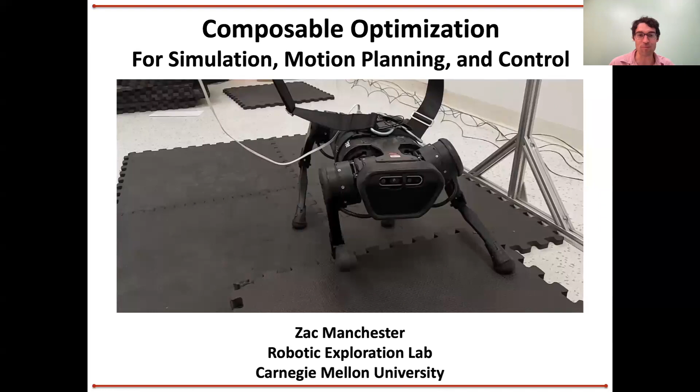So just as a little warm-up thing, and for some motivation and some of where my background is, I was actually at JPL last week, and my first love is space exploration.

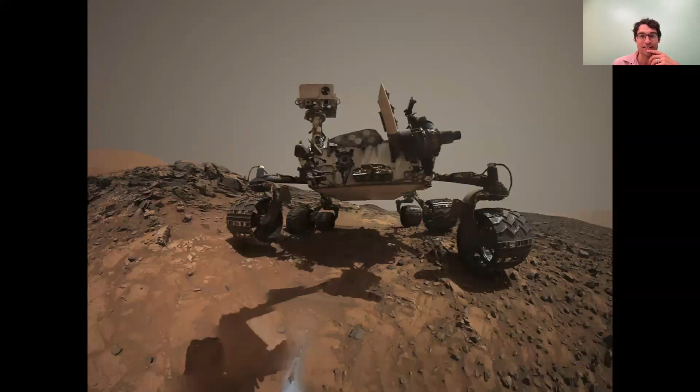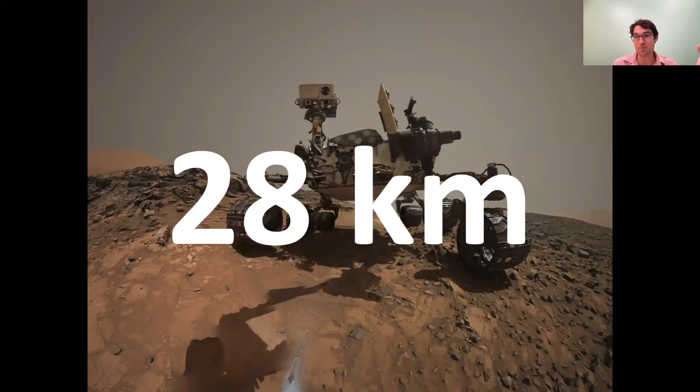This is one of my favorite robots. I got to see the spare of this on Friday in the Mars yard at JPL. This is the Curiosity rover. This thing's been on Mars for 10 years now, and in 10 years it's gone almost 30 kilometers, which sounds really impressive, covering 30 kilometers on another planet. It's an amazing technical feat. But if you divide those numbers, it sounds a lot less impressive—it works out to about 7-8 meters per day of driving.

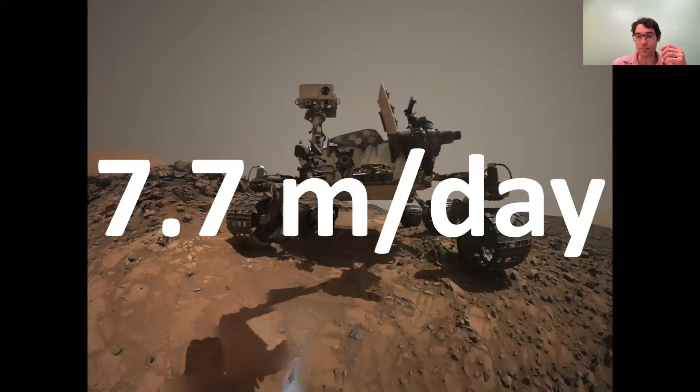What they do there is they have a replica of the rover, and they have 3D imagery all around the rover on Mars. They try to recreate the landscape around the rover in this Mars yard, and then they practice driving in the exact same terrain, as close as they can make it, to figure out exactly how to drive the rover. Once they figure it all out, they uplink the commands. So there's very little autonomy—they have worked on autonomous driving, but whenever they get into more interesting scenarios, this is how they do it. It's painstakingly hand-engineered. They figure it all out, and then they uplink everything.

And you can kind of understand why—it's very high stakes, very expensive. But the fact remains that it's a major bottleneck to covering more ground and doing more science.

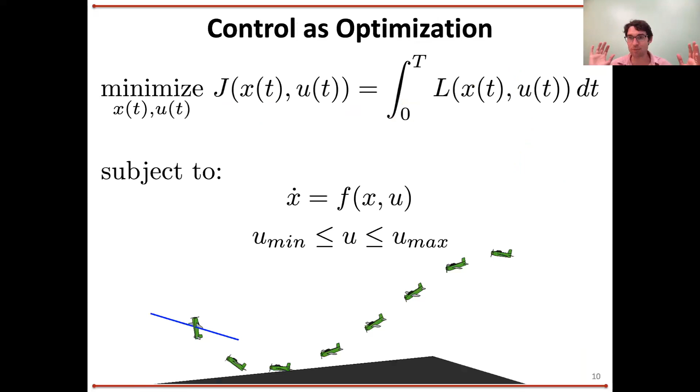So the gist of this is you have a model of your robot where you have a dynamics model, x dot equals f of xu, which you can get a bunch of ways from f equals ma to sophisticated multi-body dynamics things. Then you have constraints, maybe on your actuators, maybe joint limits, all this kind of good stuff. You write all that down, that's your model.

Then you write down what you want your robot to do in the form of an objective function. This can be something like minimize fuel use or energy cost, minimize time to get to a goal. At the end of the day, this is really encoding the behavior you want, right? And it's a bit of an art to write this down, but if you do this enough, you get pretty good at it, and you can pose these problems pretty nicely. And then you can get your computer to solve it, and out pops interesting behaviors that can take full advantage of the dynamics, respect joint limits, all this good stuff.

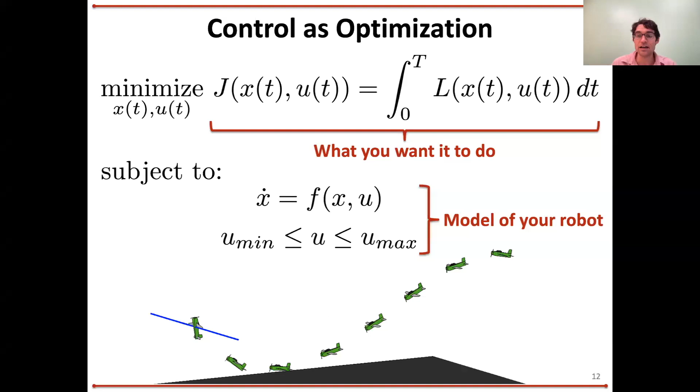Also, maybe not so surprisingly, we can do state estimation as optimization. And it also looks a whole lot like that trajectory optimization problem we just saw, the control problem. There's basically, you get a least squares loss instead of your maybe more general objective function. And then you have a very similar model of your robot. It turns out the only difference is you end up with this noise term in place of your control inputs. Otherwise it's basically the same problem, and they look really similar. Okay, so state estimation, also not a super surprise.

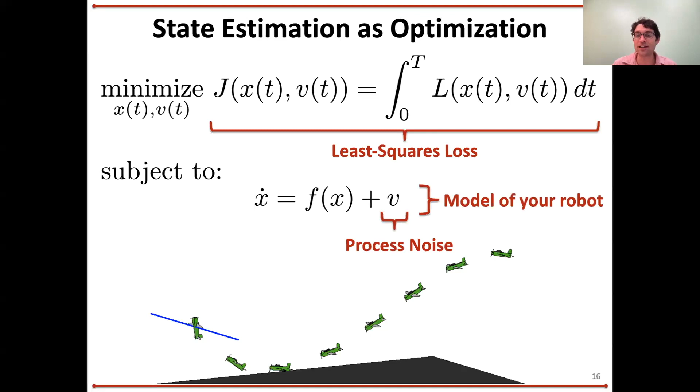And there's a long history of kind of duality between estimation and control that probably a lot of you guys have heard about. The one that's a little weirder, maybe slightly more surprising but not too surprising if you've taken an upper level graduate physics course and learned about variational mechanics, is that we can actually model physics as optimization as well.

There's a long history here, this isn't an original thing, right? But where this gets interesting, and where I think there's fun to be had that maybe is a little less standard in the robotics community, you can take this action thing. If you learned about this in grad school, what you usually do is take this thing and then try to take some kind of variational derivative, minimize this thing analytically.

And if you do that, basically what comes out of that is the Euler-Lagrange equations and all the usual dynamic stuff you're used to. Traditionally, when you learn this in a physics class or advanced dynamics class, that's what happens: you do optimization here in continuous time, and then you get Euler-Lagrange equations, and that's where you live forever.

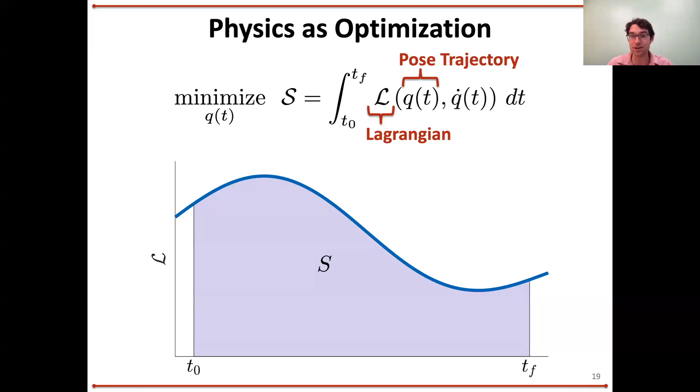But if you take this optimization problem more seriously and really think about this as the fundamental object to deal with, and if you have some inspiration from doing numerical optimal control and solving trajectory optimization and MPC problems, you might think about directly minimizing this thing with respect to the trajectory, like you would in optimal control. So you can discretize that action integral, do this in discrete time. And now what you have is like a pretty standard nonlinear optimization problem, exactly a trajectory optimization problem, in fact. So this idea is kind of cool.

It turns out this is a much more recent idea. This dates back only maybe 20 years or so, to the early 2000s, and was really pioneered by Jerry Marsden, who's a famous applied mathematician at Caltech. A couple of his students are still playing around with this stuff.

What turns out to happen is basically: discretize first, then optimize, rather than the classical way, which is optimize in continuous land and then use a Runge-Kutta method and discretize that. So that's one way to think about it. It's also super closely related to collocation methods and optimal control. And there's lots of cool things about this.

These things are called variational integrators. They do cool things like preserve momentum and energy, and that's why math people care about it.

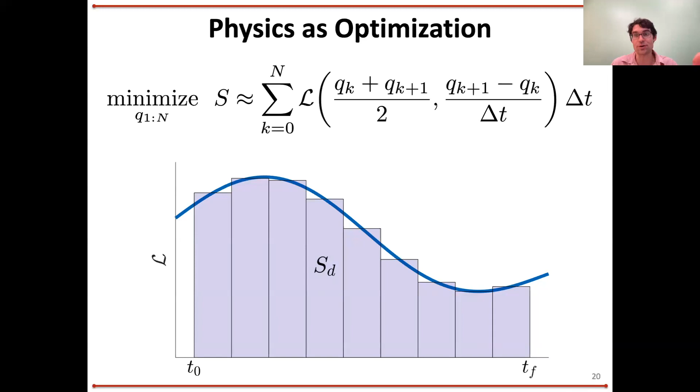But there's a more nuts and bolts practical reason why I think we should care about this stuff in robotics, which is: now that I write this down as a more or less standard optimization problem, and think about it like a trajectory optimization problem, I can now think about adding additional constraints to it. In particular, for thinking about contact dynamics, I can throw a constraint like this in here, this being a gap function or signed distance function, phi.

Essentially what I'm doing here is saying, think about a brick, and Q is the pose of the brick. I can put a constraint on here that says the brick's not allowed to go through the floor, that its height has to be greater than or equal to 0.

And if I solve this in the normal way with a constrained optimization solver, all of a sudden what you get out of this basically for free is impact dynamics. And unsurprisingly, the Lagrange multiplier of this constraint ends up being the contact impulse or force, and everything more or less works out like you'd expect.

And it turns out if you look at this, it's very closely related to time stepping methods, like the classic Stewart and Trinkle kind of stuff, if you're familiar with that. It turns out this is, I would argue, a strictly better and more accurate version of this.

To get from here to the Stewart and Trinkle time stepping stuff, you end up making a bunch of additional approximations and linearizations in certain places. So this is a bit more accurate or principled way of getting at time stepping methods. So that's impact dynamics.

The next piece of the puzzle is Coulomb friction, if you're worried about manipulation and walking kind of stuff. And it turns out this is also an optimization problem, a little bit different flavor. This is the maximum dissipation principle, if you've heard of this. Essentially it says that the friction force B that you get is the one that minimizes the instantaneous rate of change of kinetic energy. So this is dissipation.

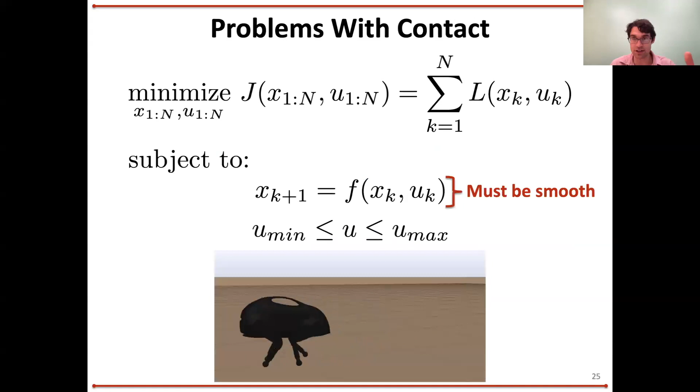Like I have to be able to take gradients, right? Because at the end of the day, when I try to solve something like this on a computer, I'm always doing some version of gradient descent, Newton's method, right? And I need at least one derivative, often two derivatives, for all these functions in order for me to make progress with an optimization method.

And so in this context, the dynamics are non-smooth when I have impacts and things like that. And then these derivatives don't exist, or they blow up, and bad things happen, right?

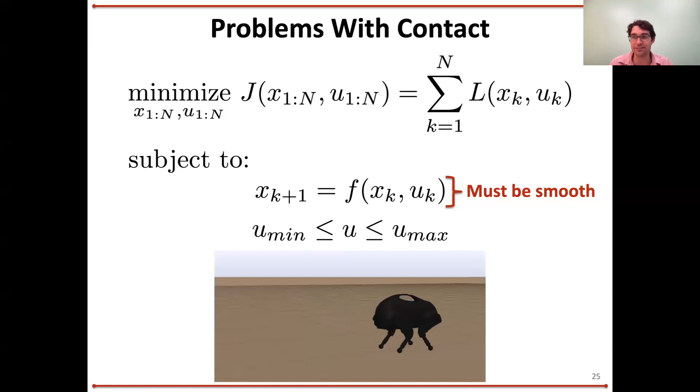So there's a few approaches to dealing with this. One is the so-called hybrid approach, which is to pre-specify what are called mode switches in the business, but these are just the exact times when you're going to make or break contact. So you can imagine in a walking problem, this would be if I can pre-specify the gait.

So if I have a biped, this is pretty easy, right? Left, right, and maybe heel-toe, that kind of thing. But if I can pre-specify the timing and the ordering for all these contacts, then what I can essentially do is bake that into the optimization problem as a set of constraints, like they're a priori in there.

This is what you have to do. I'm basically just optimizing over the smooth segments in between these impact events. Now I'm back to the smooth problem I know how to solve. By pre-specifying when these contact changes are going to happen, I can basically remove them from the optimization problem, and now life is good.

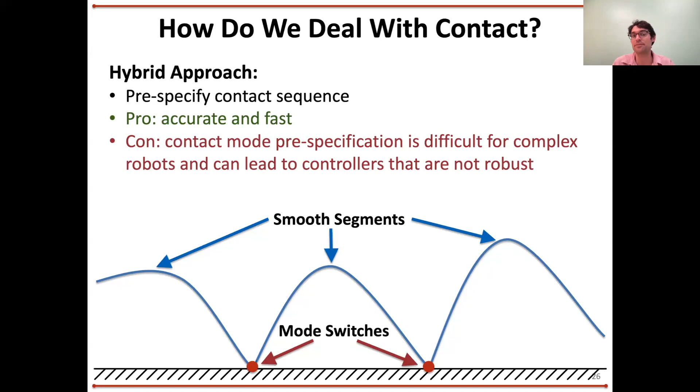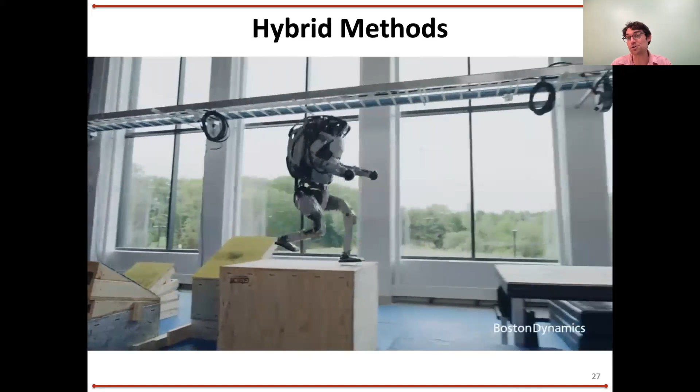This has been hugely successful. This is, I would argue, the standard approach, and roughly speaking it's what these Boston Dynamics things are doing, and a lot of the quadruped videos you've seen are doing this kind of stuff. You can do amazing, super sophisticated things with this.

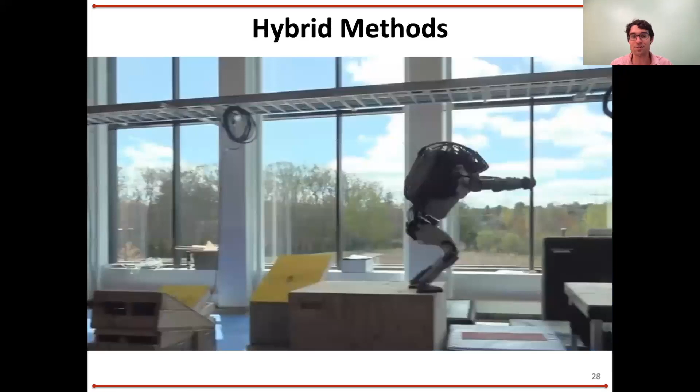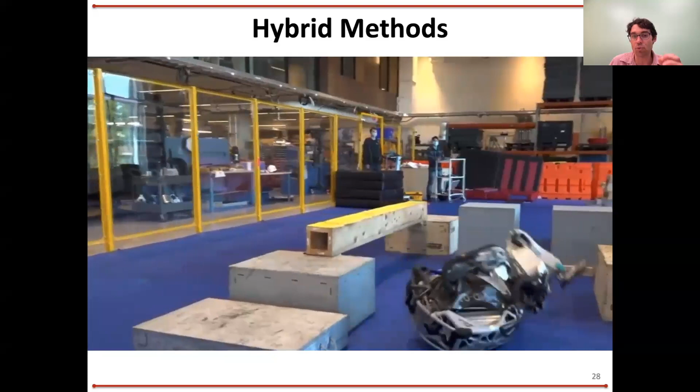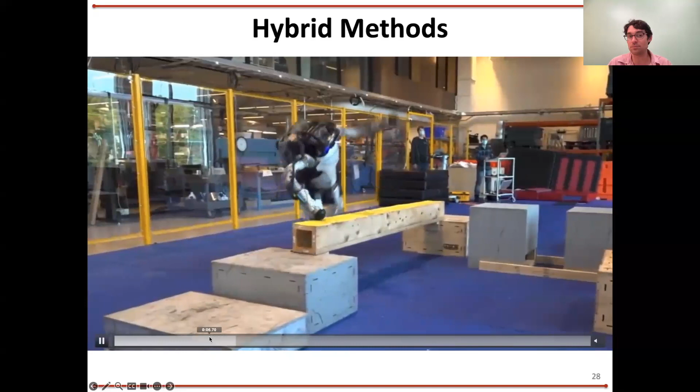But there's a key issue: if you look critically at the blooper reel videos that Boston Dynamics and many others put out, you'll notice that almost all failures come from unplanned contact events. In this video, clearly the plan involved the robot jumping over without the foot touching the bar. But things are a little off, there's some error in the state estimator, and the foot ends up grazing the bar.

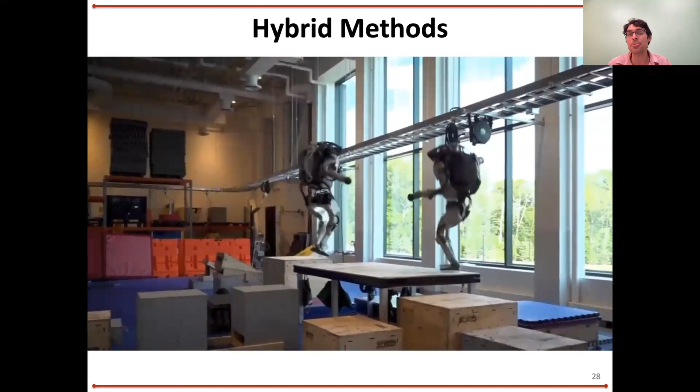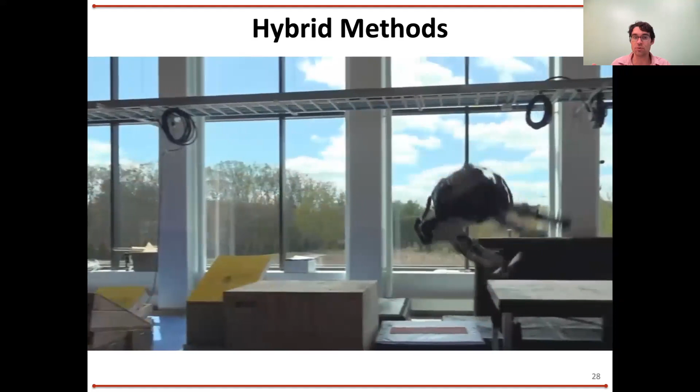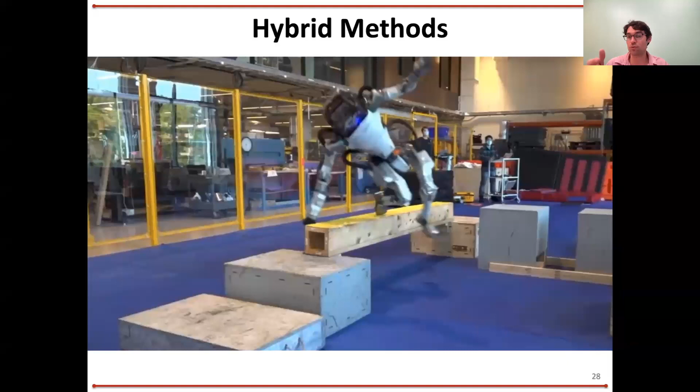And now it fails. At the end of the day, the reason is these hybrid methods assume a certain contact mode sequence. One way to think about it: the controller is essentially running open loop on the contact modes. You've assumed the modes will happen in this order, and these are the only parts of the robot that will touch the environment. If online, due to disturbances, the robot inadvertently makes contact with another part of its body with the environment, the controller has no way of reasoning about that, because you've baked that in as a prior, and it just can't recover.

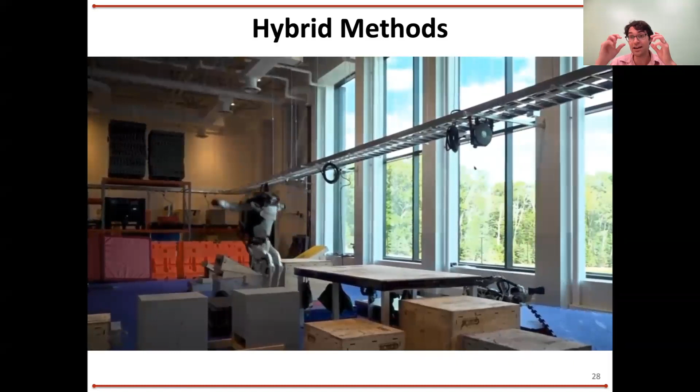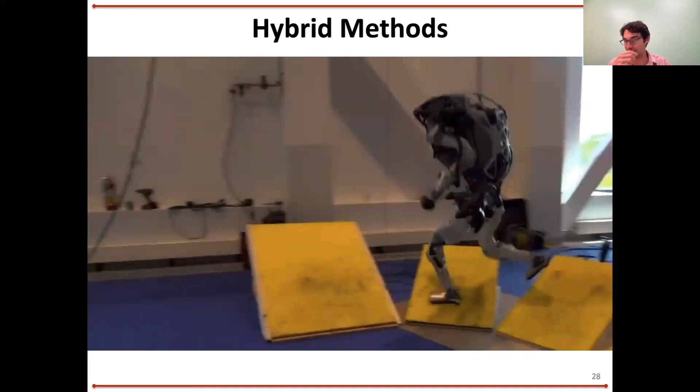That's the key issue with these hybrid methods. In practice, a lot of the control stacks for these things end up with a lot of heuristics to do things like push recovery, where they just have a laundry list of 'if this, then try this other thing' kind of heuristics for dealing with these scenarios. But the controller at a base level isn't really equipped to reason about this stuff.

So that said, there's this other set of ideas that have been around for a while, going back at least a decade, called contact implicit methods. The idea here is kind of what it sounds like: you're going to try to optimize over not just the state and control trajectories, but also the contact forces, and do the whole thing. Now the controller can reason about these contact events.

But because of the non-smoothness and the problems with differentiability, historically these things have been really fraught with challenges. You either smooth out all the contact stuff to get those derivatives, but then your physics is not accurate and it doesn't work in the real world. Or if you crank up all those stiffness parameters to make it more realistic, you get really stiff dynamics equations. The ODEs become really hard to integrate, things start to blow up on you, and you can't optimize. So there's all kinds of numerical problems with this.

Essentially what I'm going to tell you about now is a way to sidestep the severe numerical difficulties with this setup. The overall set of ideas here is what I've coined — I don't know, this is kind of what we're going with — composable optimization.

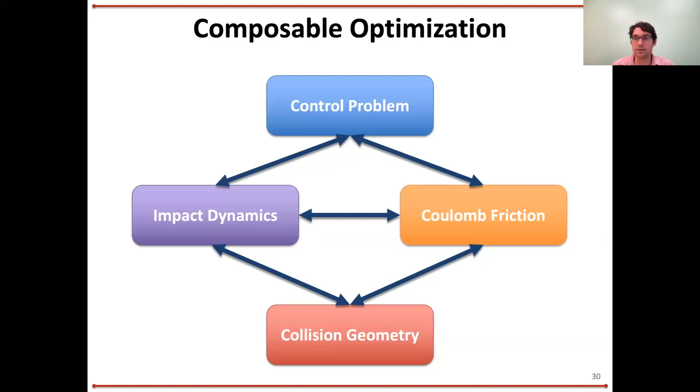So there's variables that show up as external parameters or problem data in one problem that are decision variables or optimization variables in the other. So how do we hook these together? The key idea we use to attack this is the idea of a differentiable interior point method. We use interior point methods to solve each of these problems—so each of the blocks, the impact dynamics, the collision detection, the Coulomb friction unit—we're going to write an interior point solver for each of those blocks. And in many cases, those subproblems have nice properties.

So for example, the Coulomb friction problem is a second order cone program. It's convex. We know how to write nice interior point methods for these. So we write down a good interior point method for that problem. It's tailored for that problem. And then it looks like this, right?

So if we take the example of the Coulomb friction thing, f would be minimizing the energy dissipation. And theta would be like the normal force that comes from the other problem. We're not optimizing over theta here. We're getting it from the other block, right?

Okay, but the problem's solution depends on theta, right? And so in order to wire these things all together and jointly solve this whole thing, essentially what we need is the ability to extract gradients of the solution with respect to theta. If I change theta because it's coming from this other problem, how does that impact the solution of this problem?

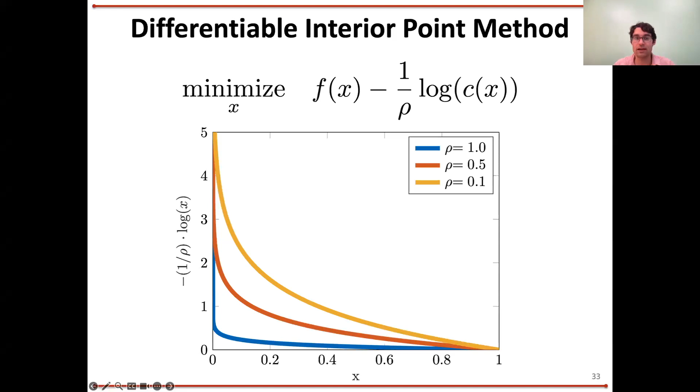Okay, so the upshot for us is that once we've put it in this log barrier form, it's smooth, and I can take this and differentiate it. So we basically just differentiate that log barrier version of the problem, the interior point problem. And now we can use this implicit function theorem trick, and we can get all the derivatives we want, right? So basically we can get the solution, we call it the solution x of theta here. It's the solution of this problem, the x that is a function of theta, effectively depends on theta, and we can get this gradient or Jacobian matrix or whatever. And this basically lets us get all the derivatives of all those blocks and then hook them together into one big outer optimization problem.

What else is there to say about this? Yeah, that's the essential idea. Yeah.

I think Matt has a question.

Matt? Yeah, so I can see this working for problems that are largely free space, like jumping around on blocks, where it's extremely easy to find a feasible point right from the start. Your feasible point is that you just jump right up in the air and land at your goal. But for example, for something like a snake in a maze, finding a feasible point to start with and staying feasible, which implies a schedule for rho, is not so trivial.

Yeah, so there's lots to say about this. One thing to say first off the bat is that there's actually pretty straightforward tricks for doing what's called infeasible starts with these interior point methods. These are actually standard in the literature, and all the standard solvers play these games. So you don't need a feasible initial guess, it turns out. I could talk more about how that works - it's a basic little trick that you can play.

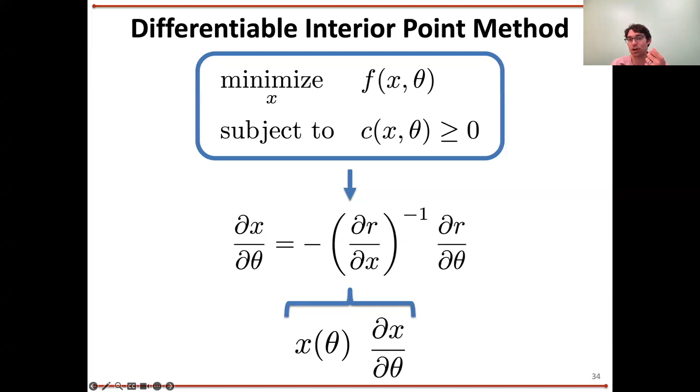So what we end up doing in practice is we can solve the problem, find X to high precision, but then we basically cache the solutions as you converge, and we return this derivative for a past solution with a more relaxed rho. So one way to say it is you can kind of have your cake and eat it too. You can get the correct answer X, and then use a slightly more relaxed log barrier when you compute the gradients. And it turns out this works really well in a lot of practical scenarios, and it gives you this best of both worlds thing. We can give you accurate contact dynamics, and we can give you smooth derivatives that are informative for planning and control stuff.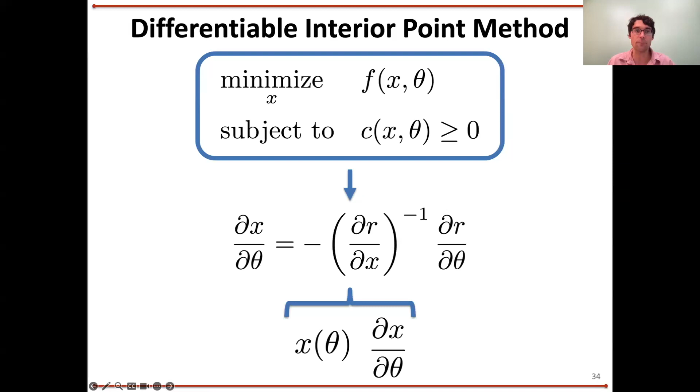Okay, so next up, what can we do with this? I'll mention a few things we've done. One is we took the dynamics, friction, collision detection pieces of this puzzle and stuck them together and made a simulator out of this. It's work from two of my PhD students over a couple of years who recently graduated, and at least one of them's at BDAI up in your neck of the woods now, Simon Le Cleac'h.

So kind of the punchline here is, yet another robot simulator. Why do we need this?

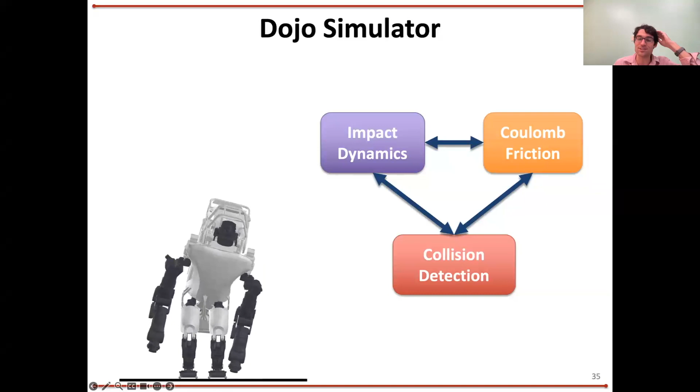This was very much a research project, but the answer is that we can get hard contact dynamics. We solve those problems to convergence, to tight tolerances. Because of the way it's formulated, we get no interpenetration artifacts, no creep artifacts. Because of the nice integration properties of these variational integrators, we get good energy and momentum conservation behavior. If it's a conservative problem, the dynamics are conservative, you get that.

And you get good long-term energy behavior, realistic energy and momentum behavior, even with forced problems that are not conservative. And then finally, you can have this have-your-cake-and-eat-it-too kind of thing where you can back off on the log barrier a little bit when you return the gradients, so you get this nice best-of-both-worlds thing.

One thing that comes up a lot is that this is more expensive than most of the other simulation methods that are used, and so you can't simulate as fast. I totally agree with that. It's absolutely true. The problems we're solving here are way more expensive to solve. We're solving these big, nasty, nonlinear problems at each iteration.

But we can run these in real time, right? So this Atlas, this is the full, all-degrees-of-freedom model of Atlas, running at about 80 hertz on a single core on a laptop. So you can run things in real time.

And I think my overall argument here is, when people say this, they're used to simulators that do bad things when you take big time steps. So you need to simulate it at 1 or 2 kilohertz to not have crazy artifacts. What I'm saying is here, you don't have the artifacts. So we shouldn't need to simulate a humanoid robot at a kilohertz. There's nothing in the dynamics that's that fast, right?

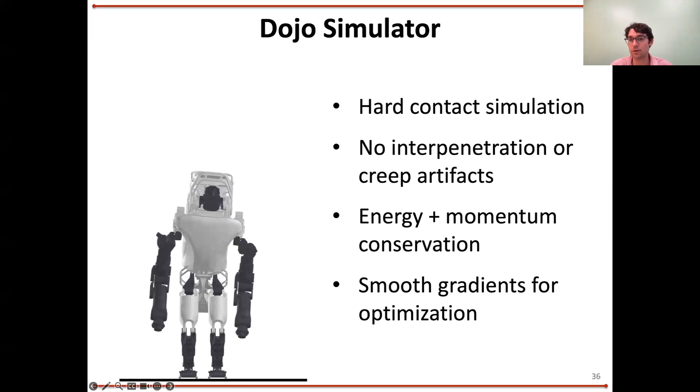And in the simulation context, it actually worked great because you can warm start it. So if you take one step, you're always starting the next simulation problem, the next time step, using the current time step as the guess. If you're taking reasonable time steps, the solution's not changing a ton. At 100 hertz, the answer in 10 milliseconds is not that different from the answer now. So it turns out the warm starting is really effective here, and we can generally solve these in a couple iterations of Newton's method, and it's not super terrible. Hopefully that answers the question—I guess ask later on again.

Sure. Yeah, happy to try more.

One thing I wanted to point out that's also really interesting about this: one way of thinking about this whole setup, using language borrowed from the CFD and FEA communities, I would call this tightly coupled as opposed to loosely coupled. In a classic simulation setup used in robotics, you'd have a collision detection library doing something like GJK, returning normal vectors and signed distance functions. That gets fed into your dynamics and you take a step.

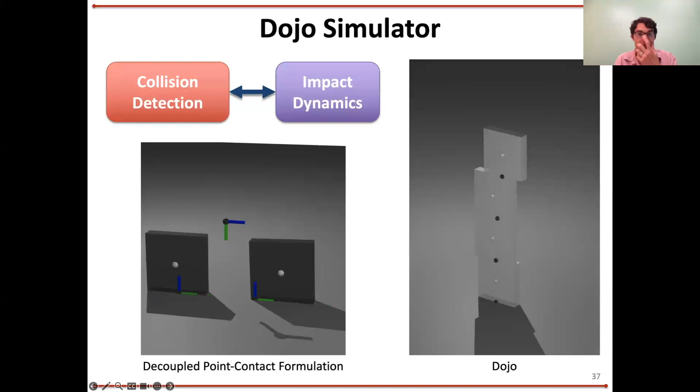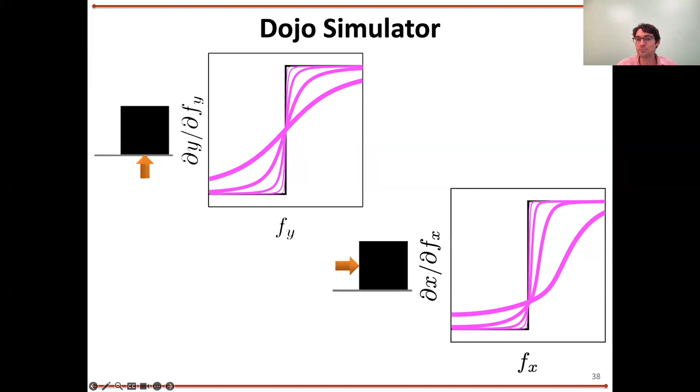Yeah, question. Scott, oh, please go ahead. I have a question. So how does it handle things that might bounce?

Yeah, so this is a fun one that is sort of like a bit of a philosophical argument for me. So you'll hear people talk about the fact that these are like rigid body models here, and you'll hear people talk about coefficients of restitution and bouncing and softness and all this stuff. And I guess I come at this with a stance, which is: here, this is rigid body dynamics.

If I write down that least action thing with a constraint, what comes out of that is perfectly inelastic contact. That's what comes out of the physics. And so that's what all of this is.

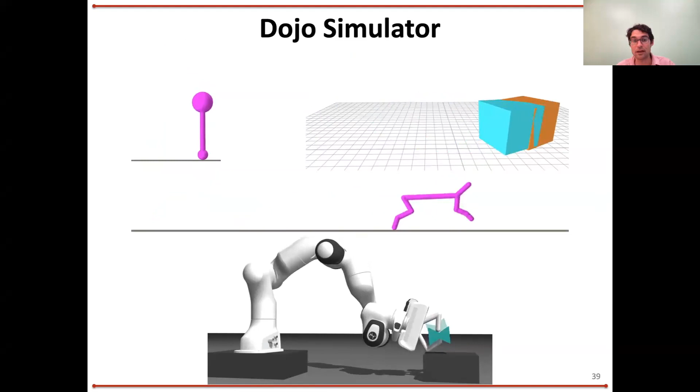At the end of the day, what's really going on there is there's deformation and dynamics that you could get out with an FEA method and modeling the flexible dynamics. And I'd argue I'd rather go at that in a principled way and model those degrees of freedom explicitly, and have something physical to tune that's got some basis in reality rather than making something up. So yeah, you can do it, but you got to model it, essentially, is the deal.

Thanks. Sure. Okay, and then the last piece of the puzzle is putting all this together and doing control on top of it now. And so we've done this. Here's a couple of cartoon examples: a couple quadrupeds walking, climbing up on a step, whatever.

So you can do this using standard stuff. This is all done with collocation methods, I should mention, offline. But the unfortunate thing is that these very short trajectories take like 5, 10, 15 minutes to solve offline. They're very expensive, right? It takes a long time, nowhere close to real time.

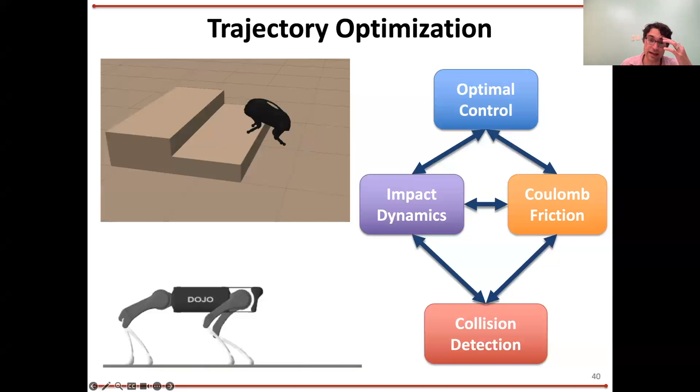So what we then started looking at—I should mention, the dream here is to be able to do this on the robot in real time. That's what we want to do. So we can do it offline. So then we started looking at what in this whole setup can we start approximating to do this online.

And what we were very much going for was the closest thing to classic convex MPC that we could get here that still reasoned about the discontinuous contact dynamics. So we wanted to approximate as much as we could while still retaining the ability to reason about contact modes, right?

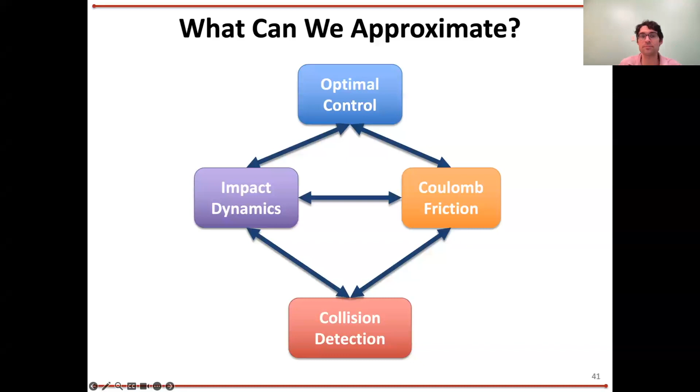So here's what we did. The first thing is we took this optimal control problem, solved it offline for some gait that we liked, and we then wrote down a tracking cost. So now we're doing reference tracking instead of solving the problem from scratch. So that automatically makes it easier, or just sort of easier.

And then what we're doing here, inside the control problem now, we have a quadratic cost that's just a reference tracking cost. It's like squared error from this reference trajectory we're trying to track, right? So that makes that easier.

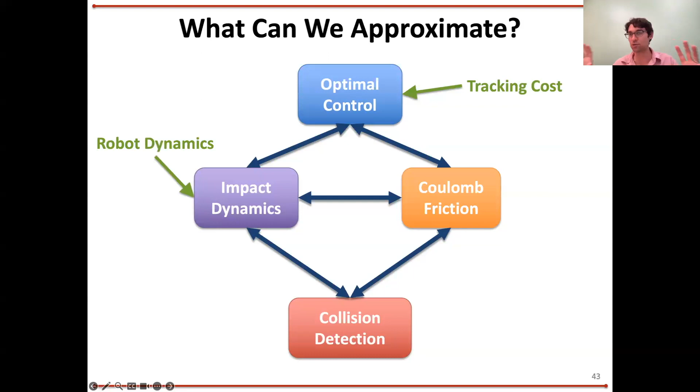Then in the dynamics, we're going to take that reference trajectory and linearize all of the rigid body dynamics about that reference trajectory. What I mean here is we're not linearizing any of the contact stuff. This is purely just the manipulator equation kind of dynamics for the robot. So we go in and linearize all of that about the reference trajectory, and now that's nice and simple.

Then for the collision detection kind of contact part of this, we go and linearize the signed distance function. So what we've got now, if you're familiar with complementarity and all this kind of stuff, is we basically turned the dynamics into a linear complementarity problem. We've linearized all the rigid body dynamics, and we've effectively linearized the contact manifold of that phi function, so all the pieces are now linearized, but it's retaining that complementarity, that sort of switching between contact or not contact.

And then lastly, we also linearize the friction cone, which isn't strictly necessary because that thing's already convex, but it turns out it's a little faster to solve that with a pyramid instead of a round cone, which is a pretty standard approximation.

So you go and do all this stuff, and roughly speaking, what this ends up looking like is a quadratic tracking objective, like exactly what you'd see in a classic QP. If you were to do whole body kind of tracking control, we linearized everything out of QP, and this is kind of what the optimal control problem looks like. But then the dynamics constraints are basically a linear complementarity problem. That's sort of where all the pieces have been linearized about this reference, but it retains the complementarity stuff.

Another way to put it: we're retaining the overall block structure here, where each of these is like a full optimization problem with all the constraints and all the nastiness, but we've made the insides of those problems nicer and easier. Okay, so that's the setup.

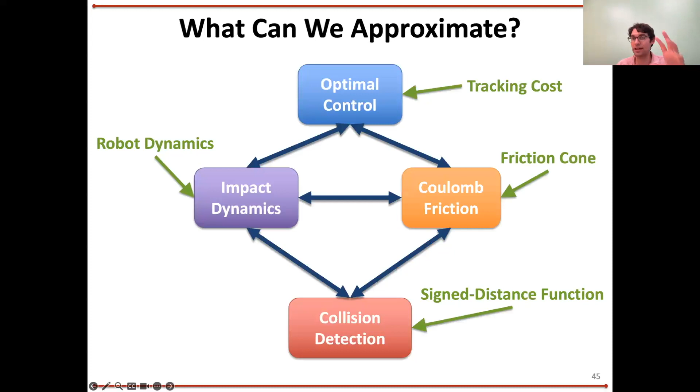In this particular case, it turns out because we went and did all this linearizing ahead of time offline about a reference trajectory, most of the matrices in this whole mess we know ahead of time, because it's mostly stuff that's been pre-computed, like Jacobian matrices for the dynamics about the reference, all that good stuff. So most of the stuff in this big matrix we have to factorize, we know offline—something like 90% of it—and only about 10% of it is actually changing online in real time.

So what we ended up doing is we form all these giant matrices that we need to solve, and we permute all the entries—we permute rows and columns in these things to line everything up so that all the stuff we know offline ahead of time is pushed all the way to the left of the matrix.

All the stuff that we need to update online is pushed all the way to the right in the last few columns. What we do is offline, we start computing the QR factorization, pre-computing it across as many columns as we can with everything we know a priori. Then online, all we have to do is fill in the last few columns and finish the factorization. Just doing that, being a little clever about what you know offline versus what you need online, and pre-factorizing as much as possible, we ended up with a 15x speed up. That's basically the key trick that made this doable in real time.

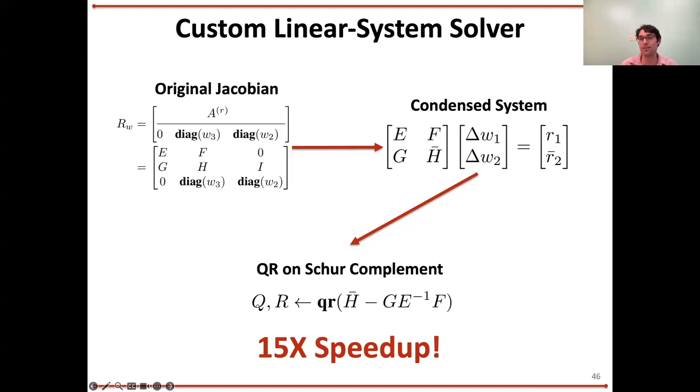It's kind of like digging really deep into this sparse linear algebra stuff and thinking hard about that. Lots of crazy heroic implementation work.

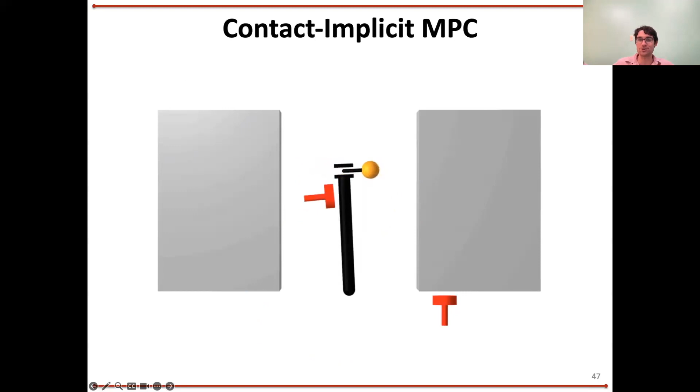So here's some examples of stuff you can do with this. Some toy problems first. This is something we call PunchBot, an inverted pendulum with a little arm that can push against the walls to balance. You randomly perturb it, and it's got to not fall over. The inverted pendulum is linearized about that vertical upright equilibrium, and that's it — we don't give it anything else. The reference is just stand straight up, nothing else, no contact at all in that reference. Then we just hit it, and this comes out: when it gets hit, it can reason about putting that arm out and touching the walls to recover and balance. Roughly speaking, this is a cartoon proxy for push recovery, and again, there's no pre-specified mode information, no contact in that reference whatsoever — it just figures it out. That's kind of cool.

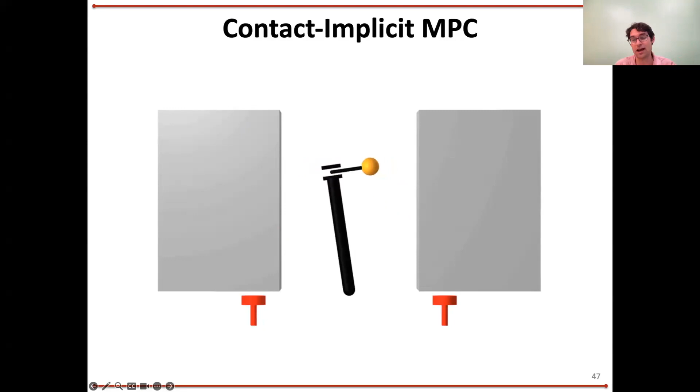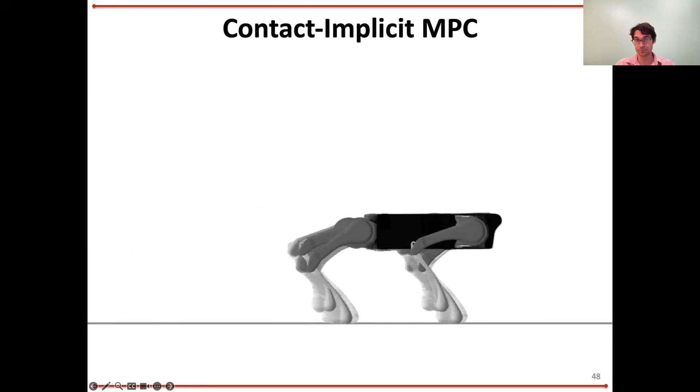Here's an example of that reference tracking on a quadruped. We're initializing this with a huge number of randomly sampled initial conditions, then showing what happens as we roll them all out. You can visually see that after a few seconds, all those initial conditions converge towards the desired reference trotting gait. So you get this nice stabilization and convergence behavior.

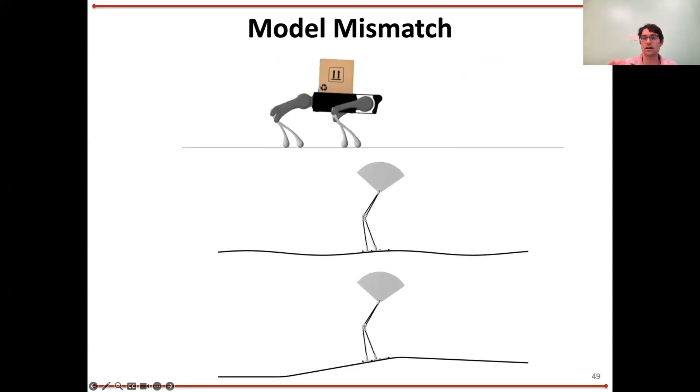Some examples of throwing model mismatch in here, where we've messed with the dynamics of the robot, or put it on terrain when the nominal gait was for flat ground — and we can put it on weird terrain and it still kind of works.

This one, as far as the toy examples in sim go, is probably my favorite and what I think is maybe the most compelling. What you're seeing here is a cartoon model of a quadruped — we call this the point foot model. It's a rigid body with point masses for feet, just to make the dynamics easier to write down. The reference trajectory we've linearized about is a trot at the origin — just a robot standing in place trotting. That's it, that's what you see here.

What we do is start the thing off, then kick it in the air, and it goes like 1.5 meters sideways, flying through the air. It manages to recover: it hits the ground, figures out contact, foot placement, all this kind of stuff for where it needs to put the feet to not fall over. Then it trots back to the origin in a very sane way and ends up tracking that reference at the origin.

I think what this is really trying to get at is how those linearizations and approximations in that problem end up playing out and how valid they are. You can see here pretty clearly — this is doing a whole lot of contact mode discovery, doing weird things that were not in the original contact sequence, flailing around midair, and then just nicely trotting back to the origin to get back to that reference. All that's in there is that periodic gait as the reference at the origin. For me, this is really impressive, that it can reason about all this and figure it all out from just that.

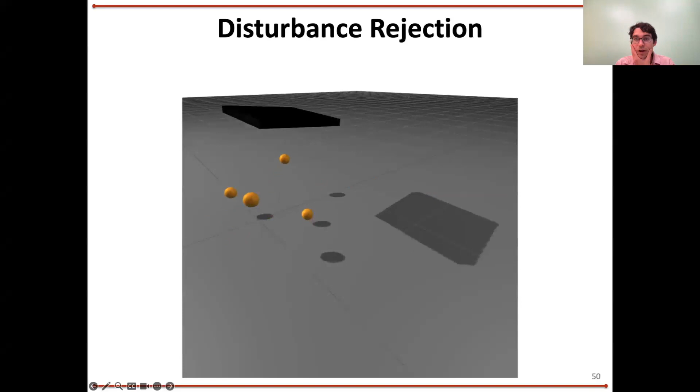Okay, and then we put this on some hardware. I would say these things are not crazy impressive versus the state of the art, but it does work. We can run these things fast enough to actually put on hardware. That's the trotting controller on the quadruped.

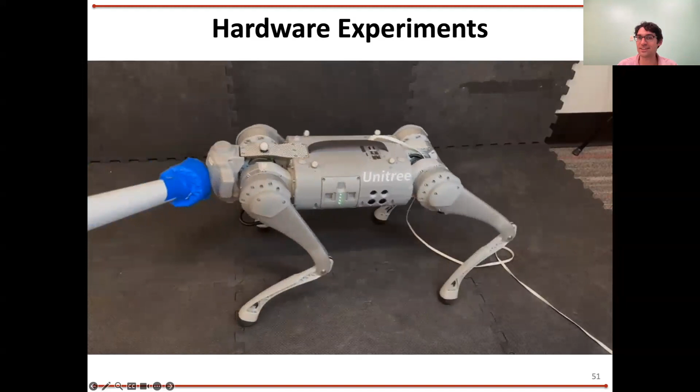And then one of the more interesting things here, right? Obviously stuff like MIT Cheetah is way more impressive than this. They're able to solve these problems much faster, and they've got really well-tuned heuristics and things. They've been doing that for a decade, right? So it's really good, much better than this. But one of the things they can't do that's kind of interesting is, we can plug in an arbitrary motion and it'll just track it, right? So we don't need to track, for example, a periodic gait, a trot, any of that. You can just give me something.

And the other thing is that it can reason about contact with arbitrary parts of the body, not just point foot contact. So this was trying to get at some of that, where we're making contact with other parts of the body, just tracking some weird arbitrary thing that's not periodic. There's more to do here for sure, but it's kind of interesting that the dream is you design some offline reference thing, anything you want, just throw it on here and it can track it.

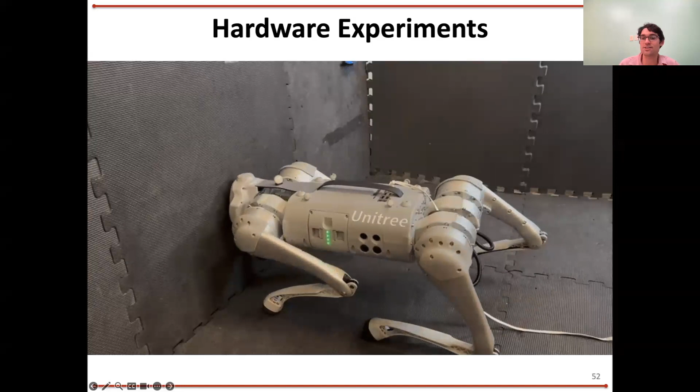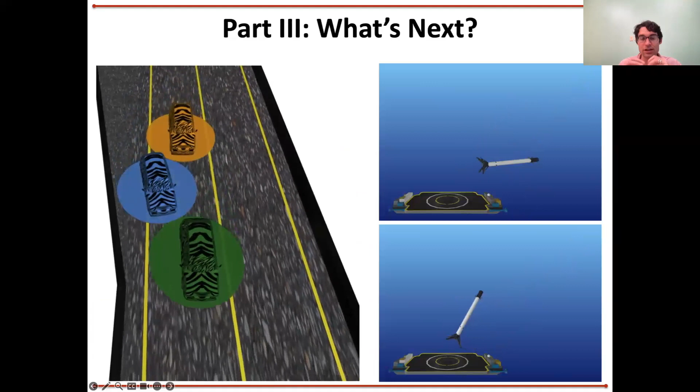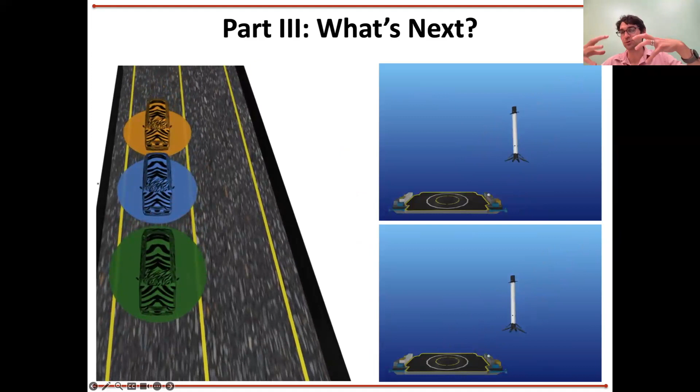Okay, so some other final summary things, some pointers into what other things we're looking at, some connection stuff. It turns out that this whole composable optimization approach has lots of connections to other things. One area is game theoretic planning and control. It turns out that the setup we're doing is actually strictly more general than, and subsumes both Nash and Stackelberg equilibrium problems from game theory. That's actually where a lot of this stuff started. At one point we were doing game theoretic MPC for driving, to reason about interactions between drivers. It turns out you can model that Nash equilibrium problem very nicely into this framework, and we can use the same solver tricks.

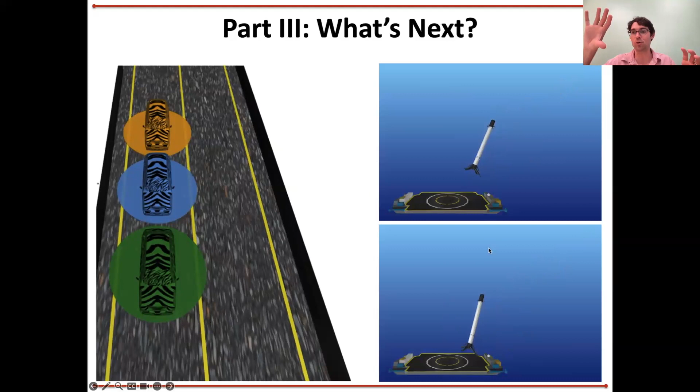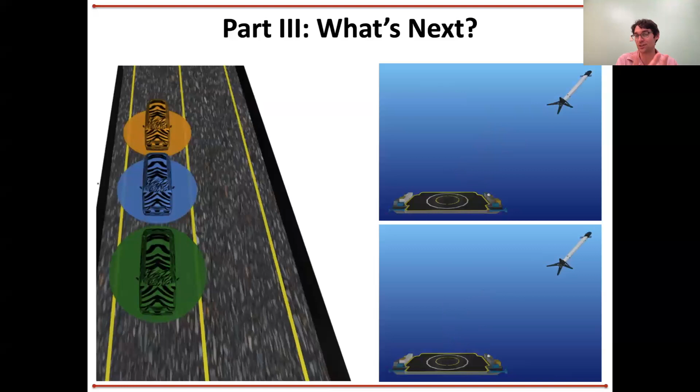And then if you're familiar with classical robust control and these adversarial ideas, it's also an instance of one of these composable optimization problems, where you have your optimal control problem and then your adversarial disturbance problem that's trying to maximize the cost, and they're kind of fighting each other. It very much has this structure of coupled optimization problems, and again fits into the framework, and you can use the same tools to get at it. So there's lots of other things this composable optimization setup can be used for.

They're kind of cool. And then at a higher level, some thoughts on where I want to go with some of these tools. One thing I think is interesting, maybe a little more philosophical, is that we hear a lot about the sim-to-real gap, especially among RL folks, right? There's been a lot of work on transfer learning, trying to get things to pre-train in sim and then go to the hardware. And one of the things I think hasn't really been taken seriously there is that most people doing that stuff haven't taken simulation and simulators seriously enough, right?

We've heard a lot about differentiable simulators too in the last few years, and actually, hot take, there are no differentiable simulators, right? All the people that claim to have a differentiable simulator, there's discontinuities in there somewhere. In particular, the collision geometry stuff we mentioned, like this GJK stuff, everyone's using that, and that's very much not differentiable. So even if they've got some smooth contact model, the underlying geometrical stuff they're doing is not differentiable. So there's fuzzy weird stuff in there.

But the bigger picture argument here is that if I go run this stuff on the hardware and I get some data, why am I not currently able to take the data I collect from a real hardware system and pull that back into the simulator and improve the simulator so I don't have to do transfer learning next time?

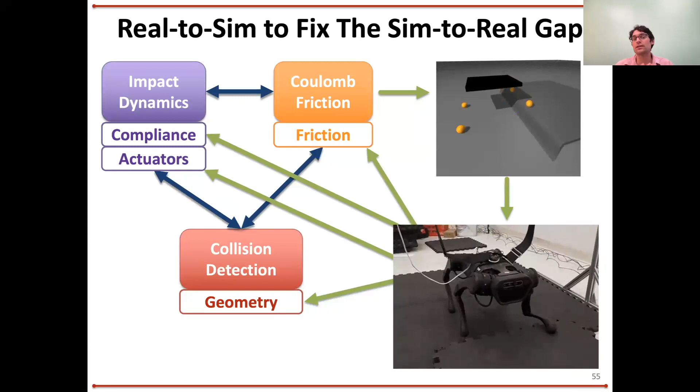One vision for doing this: imagine you have the simulator and the real robot, and the areas where maybe the model's bad, you can do some error analysis and figure out, oh, maybe there's some compliance in the legs. My actuators are not perfect torque sources, go figure. There's motor dynamics and power dynamics, weird stuff going on there. And then the classic one is friction models are terrible, Coulomb friction isn't real. And then maybe even some of this collision geometry stuff. Let's say you think there's problems in all these places.

You could imagine taking the simulator and inserting parametric models or even black box function approximators like neural networks in strategic places where these things show up in the dynamics, and then fitting those parametric models or function approximators to data from the robot. Having a simulator like this where you can take the gradients of everything and do least squares in a straightforward way kind of enables some of this.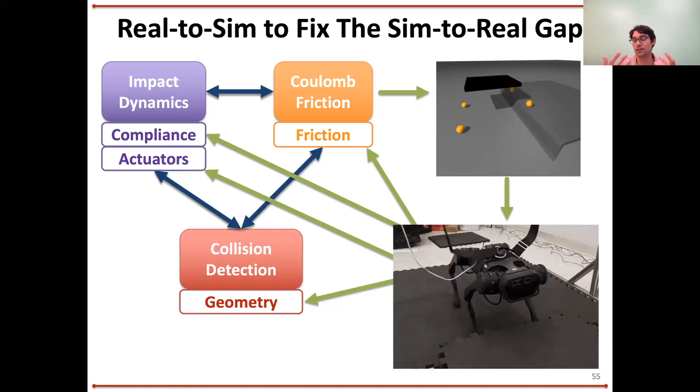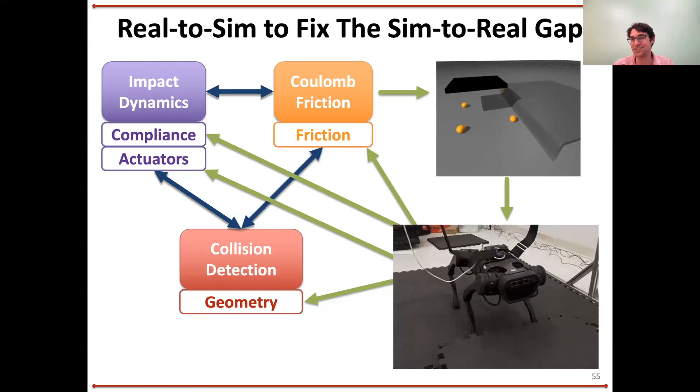So I think the idea of more tightly integrating the simulator with the hardware you're actually running, and trying to pull data back into the simulator in a straightforward way, is potentially really powerful, and maybe a way of reducing the sim-to-real gap. Another way of saying this is that we should be doing real-to-sim transfer. We should be taking the real stuff and trying to pull it back into the simulator.

Another thing we've been working on a ton recently in the lab, a long theme, but we finally made real progress on it in the last year, is trying to scale a lot of these algorithms. All the contact-implicit stuff, all the MPC stuff I showed you, to first order, is basically serial and runs on a CPU core. There's some stuff we can parallelize, but for the most part a lot of these algorithms are just inherently serial in a lot of places and ways.

That's frankly annoying, so it's super hard to parallelize these things. We've been working hard on ways of taking advantage of GPUs and throwing thousands of cores at some of these problems. I think the promise is there, the compute's there. The machine learning community learned this lesson a long time ago and has had huge strides just taking advantage of these computing resources that exist now. On the model-based control side, we've not done that—most of the MPC stuff is still running on a single core. It just hasn't happened.

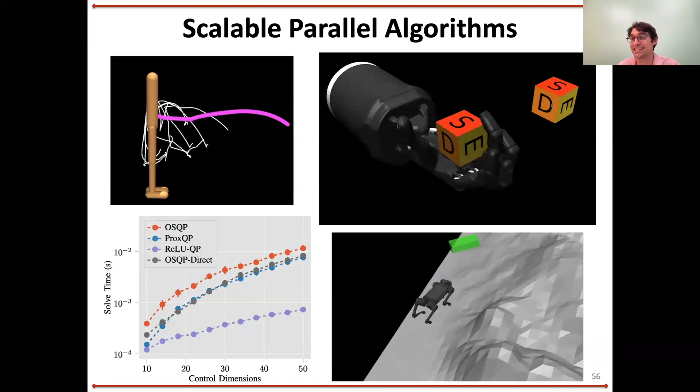We're working on this, and have a couple papers we just submitted to ICRA on this topic. One, we managed to get a QP solver for doing MPC running on a GPU—I'll tease the result, taken from the paper. We managed to run a whole body QP stabilizing controller for the Atlas robot balancing on one foot, prodding it and having it wiggle around, at a 2.6 kilohertz sample rate, on not even a super high-end GPU. So there's huge potential there, I think.

So that's about it, and yeah, love to chat more with you guys.